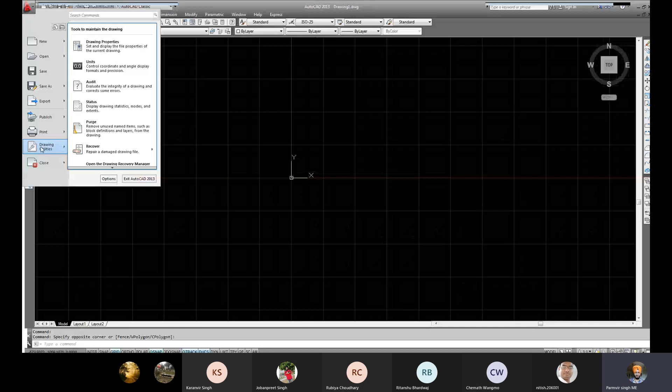Now you have the option of Close, so in this you can close the current drawing, or all drawings, or clear them. Then if you want to exit, you can exit from here.

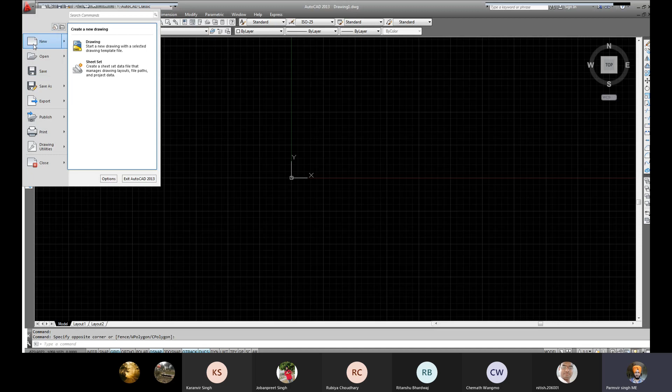Now I want to open a new file, so click on New, you have to left click on it, and now the dialog box will open.

Now you can see there is an option of where you want to save the file or where you want to open the file. This is the file name showing here, but I don't want to open this file.

Then beside Open, there is an arrow shown here, you have to click on this arrow. Then you can see there are three options: the first one is Open with No Template Metric, then Open with No Template Imperial. So you want to open it with No Template Metric.

You have to select the No Template Metric, because we want to draw the drawing in metric units, so you have to open in metric. Click on No Template Metric, and you can see the screen. So whenever you want to open a new file, you have to open it using the No Template Metric.

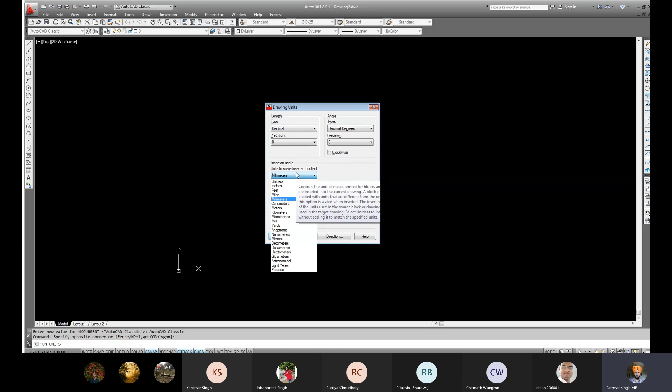Mostly civil engineering or architectural fields use inches or feet, so in future you can use inches and feet. So I have to select millimeter.

On the bottom side, it will show you the sample output. We have the coordinate system - relative rectangular coordinate system, polar coordinate system, or absolute coordinate system. In this top view, the top side is the absolute or relative coordinate system, and the bottom side is the polar coordinate system. In polar coordinate system, you will see the length and angle.

In angle, you can see 45 degree, but in case I change it to clockwise direction, select clockwise. Now you can easily see 315 is the angle. So according to the change in value, you see the change in angle. So I untick this - I want only anti-clockwise or counterclockwise, that's why I untick this.

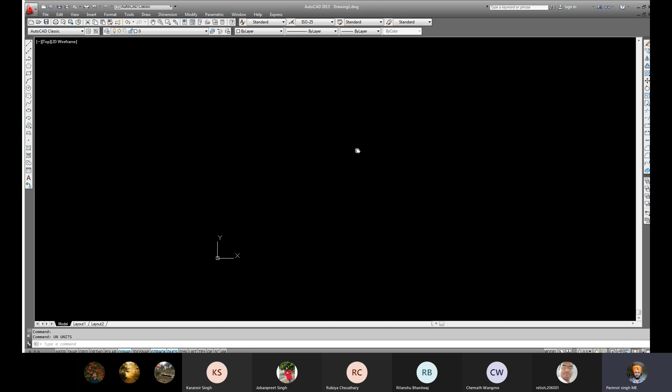In case you want to see the changes, you can enter UN. If it is okay, then okay. Now we have set the unit. Next one is, you have to set the limits - you have to set the paper size of your object.

In case I want to draw a rectangle of 40 by 60, tell me the minimum length and width of the paper in which I can draw the rectangle 40 by 60 easily, so that I can also show the dimensions properly and my drawing will be neat and clean.

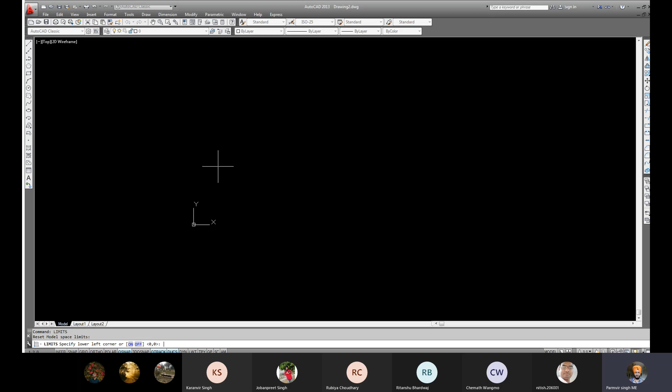Then you have to specify the lower left corner. Okay, what is your lower left corner? So you can see the XY, okay, in the lower left corner. That means this is your lower left corner.

We have to give the value of 0, 0 because all your drawing value is positive, so that's why we will give the value in positive, or lower left will be 0,0. You can change the value according to your drawing or according to your mood. Okay, so I give 0,0. Then I have to enter.

Then it is asking me to specify the upper right corner. So you have to specify the upper right corner. It is already specified as 420 by 297. It is the size or dimension of your A3 size page. But I want to change the upper right corner.

Okay, so I will give 100, 100. So this is your length and width of your page. Okay, 100 into 100. 100 is length, 100 is breadth.

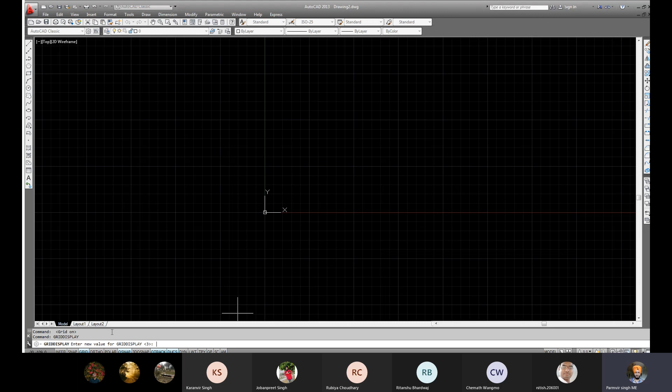ठीक है, तो 2 एंटर प्रेस करना है आपने, then enter. Now you can easily see your limit screen or grid screen.

Then you have the option of Z, zoom. You have the option of zoom, Z enter karo, then A enter for all. You have various options, you can use this option also. So I type Z, then after that I type A for zoom all, then press enter.

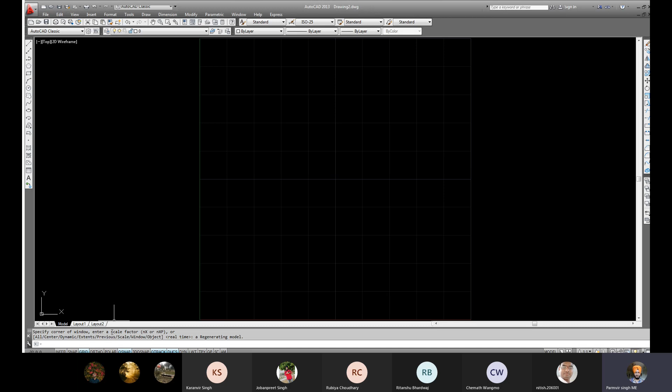Now you can see your grid or limits screen will appear on your full screen. In case you want to zoom it or zoom out, you can use the scroll option also. Scroll mouse button, okay. So with the help of your scroll mouse button, you can use the zoom in or zoom out option also.

Now in case you want to move your sheet, you have the pan option. You have to click on the scroll button, press the scroll button and move your mouse according to your placement or according to your choice.

So the next move is the drawing. In case you want to draw the drawing, you have to type the command.

So I type my command. We have to draw the rectangle of 40 by 60. Then I can use the line command, so I enter L for line. Then you have to specify the first point of your line.

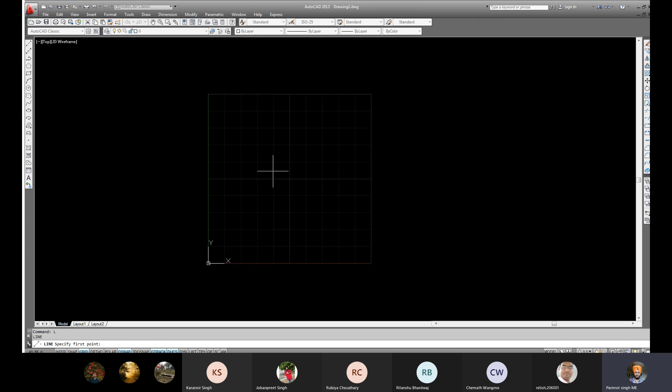So you can enter any value like 0,0 or 10,10. With the help of coordinates, you have to enter the value. So I type 10,10 as the first point, and now our drawing begins.

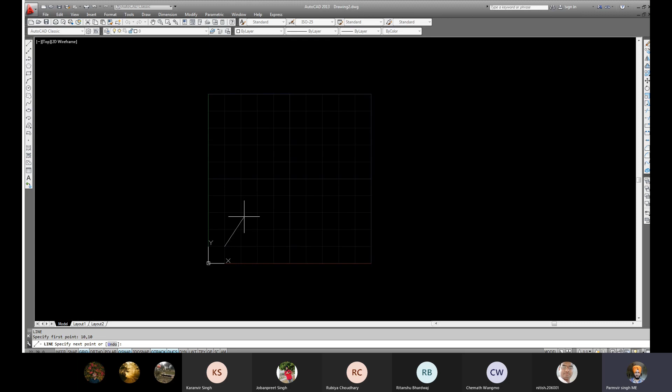You can easily see the point and my cursor, the cross point. The mouse cursor is also called here crosshair. So it is asking me to specify the next point.

So for the next point I will give my next point. Your length is 60 mm. Then you have to give the next point, adding it to the previous point.

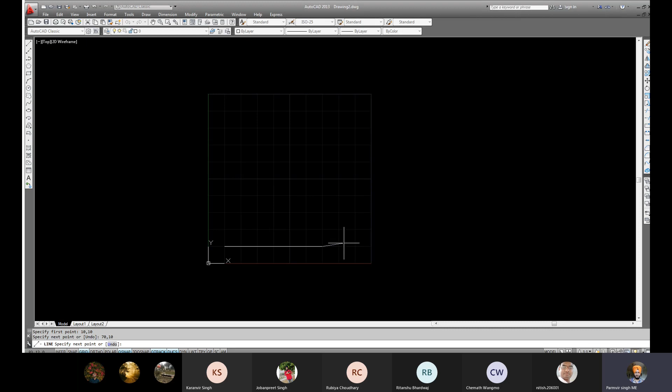In case you are drawing in an absolute coordinate system, so 10... sorry, no. 70 comma 10 — 60 plus 10 is 70, and 10 plus 0 is 10. So press enter. So there is a line of 60 mm.

Now you have to draw a line of 40 mm with the help of relative rectangular coordinate system, or incremental coordinate system. So you have to press @, then give the value. So the movement is 40 mm.

What is the x value? X value will be 0 comma 40, since 40 is your length. So I give 0 comma 40 for my length. Now you can easily see your 40 mm line is created.

Next point, you have to give the back line with the help of the polar coordinate system. Now I am using the polar coordinate system, so I enter @, then we have to enter the length. Our length is 60 mm, then enter.

So it is showing me an error: point or option keyword are required. So I typed only @60, that's why it is showing me the error. So I need @60 less than sign 180.

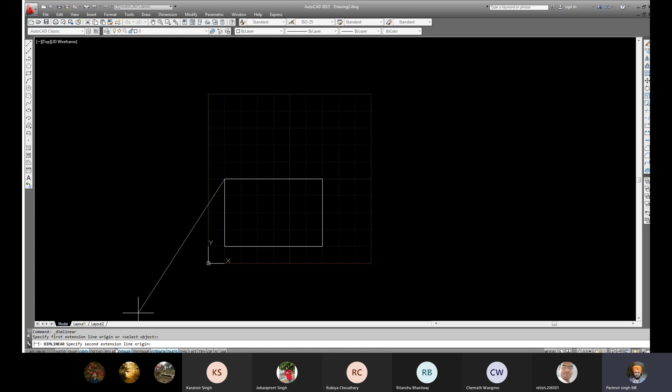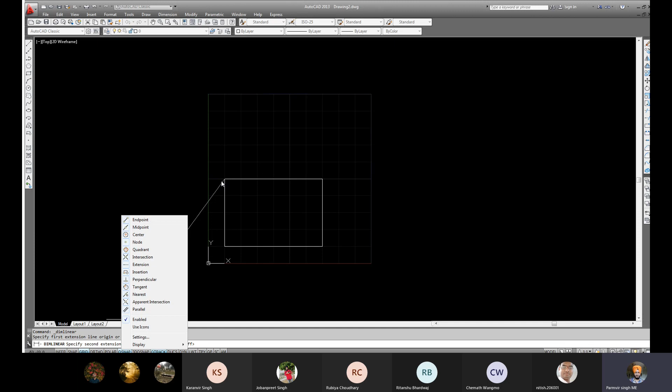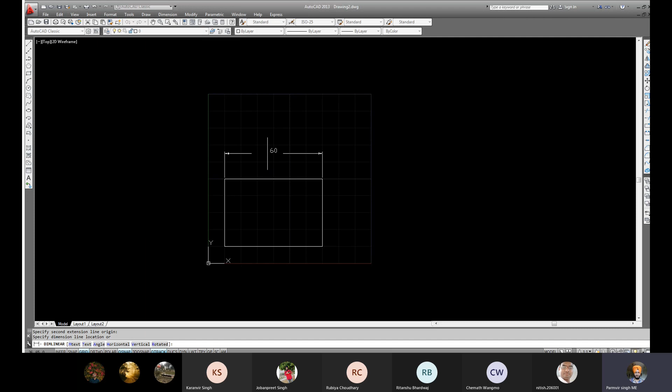I click on this, then enter, linear, select first point, then select the second point, then move your cursor up or down according to your positioning. The dimension will always be outside of your drawing.

So the length of your rectangle is 60 mm. Again check the width of your rectangle — your width will be 40 mm. Now on the bottom side, in center, you have to give the text.

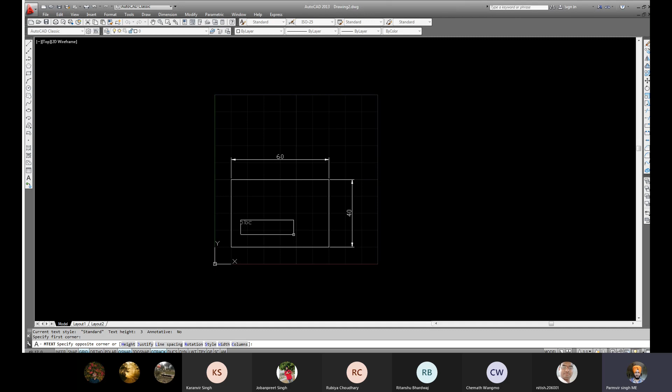You have to write T for text. Then you have to create the rectangle, giving the starting point and the end point with the help of your mouse. Now you can see the text formatting, and you can select whichever text format you want.

Mostly we use Times New Roman. Then text style — bold, italic, strikethrough, underline, overline, undo, redo — you have the option. You also have the option of color and the option of symbol, as per your requirement you can select.

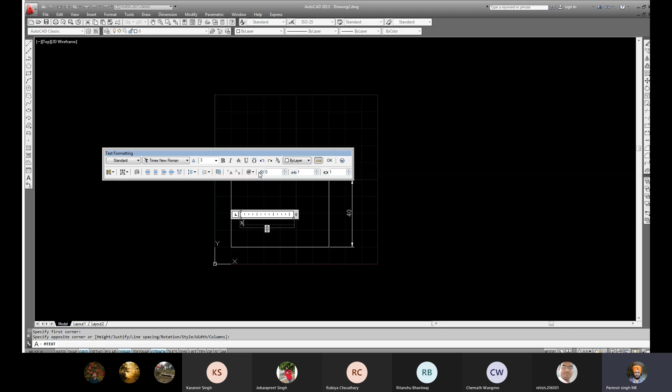So I will give XYZ. In case you want to give color to the object, you can select color, then okay. Now you can easily see our drawing is ready — ready to print, ready to send. So that's it, our drawing is completed.